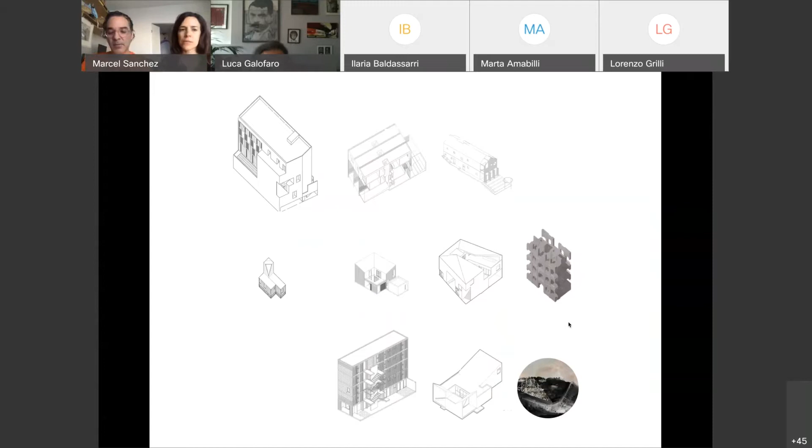And as well, we will present briefly our research in Rome and how Rome in Italy has been part of our influence in how to operate in this region. So the way has been a reference, a comparison - always a reference for us in operating in this border condition.

So we'll start with the first project, which is in El Florido, a mixed use at the outskirts of Tijuana. This is interesting - this project was interesting how it came to us. We did not look for it. This is a very common situation - we always look for the type of projects, not that the projects come to us. So it's strange for us, as we don't wait for the projects, we're usually formulating the projects, we're seeing how we can make it happen.

We're seeing how we can make it happen. So a woman walks into the architectural school that I was teaching in San Diego and asks for us to build this project in the periphery of Tijuana.

One of the first questions of these projects was how to approach and reconsider the corner strip. This was a little shopping mall at the corner in Tijuana, which is very common, where you leave it completely open for cars to park, and then the shops are stepped in the back. So it was important to define the corner with the wall, the boundary of the building, to re-articulate the street and construct the urban life.

But it was interesting also because at the end, this client comes and says, 'Oh yeah, you want to design this corner strip,' and usually right there, typically they are in the commercial area with the parking just in front. So we tried to kind of interlock it. But what became more interesting is saying, okay, the first level is commercial, the second level is a restaurant, and you have people with big bands and music - you imagine this Mexican population, right?

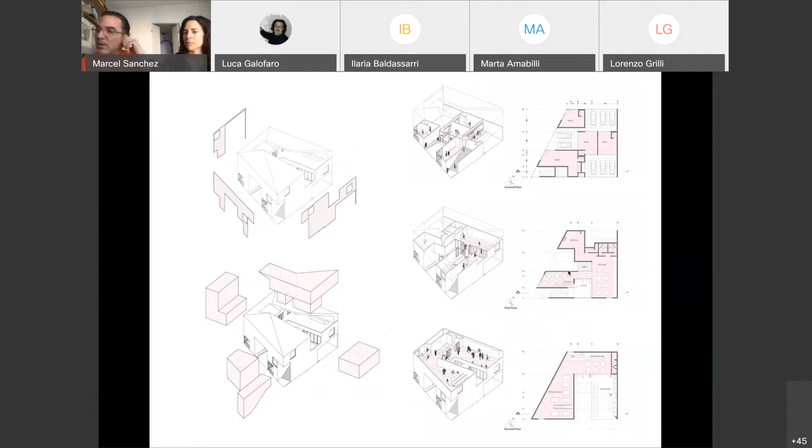But of course, at the moment when we're working with the client, suddenly it started to become rapidly about security, because the husband was in jail, he was a drug trafficker. And then suddenly we say, how do we work with this project? Suddenly the building needed to be protected, and we didn't want to work with her anymore. But at the end, we needed to finish it. So it becomes a very conflicting relationship of how to have this client.

So, anyways, in architectural terms, the skin of the wall is used as a medium to undertake this protection. We also had to consider that the buildings in the area have no maintenance. So the wall became this idea of drift, of dust becoming a second skin, a rain screen facade controlling climate, while taking advantage of time, using dust and its accumulation as a design opportunity, and the movement of the sun as a way to play with the effect of decay, how this dust gets celebrated as a registration of time.

So through the design, we designed this idea of 3 modules, concrete modules, that become this security blanket, also as a collection of dust, creating this effect across the whole facade.

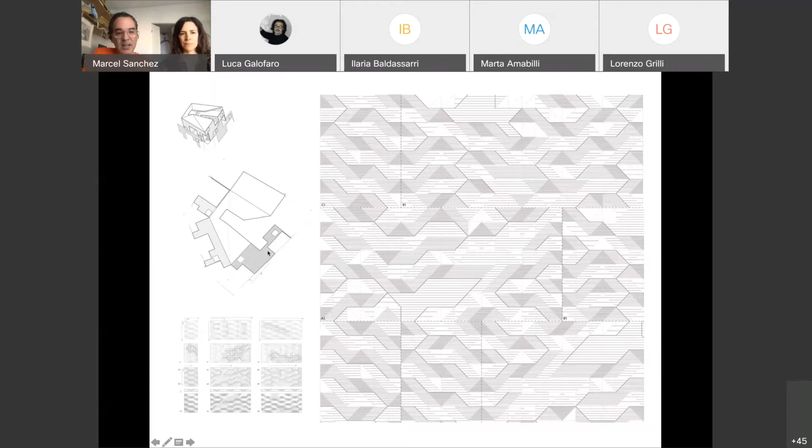So we started testing different materials — aluminum, concrete, and some wood elements. Concrete became the most practical to use. Of course we use technology and so on, but the technology is never the main driver of the project; we use it to understand the moment of construction, how to expedite things. So in this case we used concrete, and here you see the prototype.

Yeah, so here we have another prototype, a sample of the concrete. But we use concrete, right, to do that. Sorry, let me.

So as you saw, this is the effect of how the wall gets transformed and how dust gets accumulated. And here we see the idea of decay, how the registration of time becomes part of it. Of course, this is a project totally influenced by what we saw in Italy, how these walls that have a very luminous quality become part of the aesthetics of the building.

So now we're going to talk about the project that Luca was mentioning. This project is Casa de las Ideas.

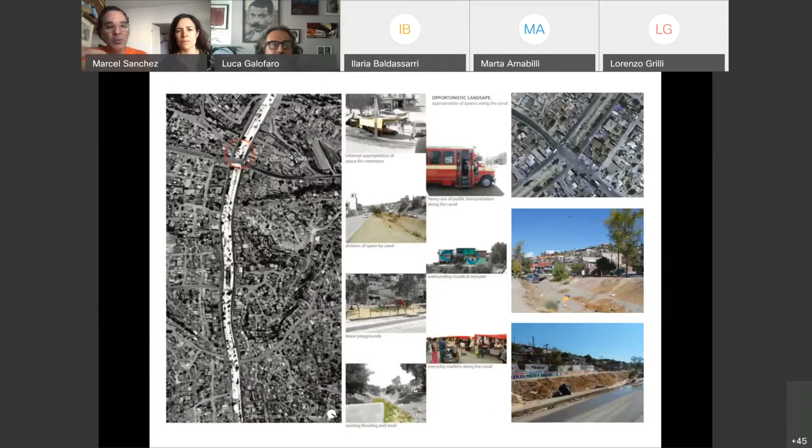So usually what happens is these are very topographical sites. Tijuana has a very strong topography, and usually the river or stream where water comes in becomes the only place people use as a movement corridor, and it becomes the depository of all junk and trash.

So it becomes a conflict because it's a point of infections and problems, but also the only way to access the city or get into these remote neighborhoods. One aspect our project tried to rethink is that we needed to do something about it. The concrete channel already floods whenever there's a problem, so we needed to find a way to stitch together the two sides of the river watershed.

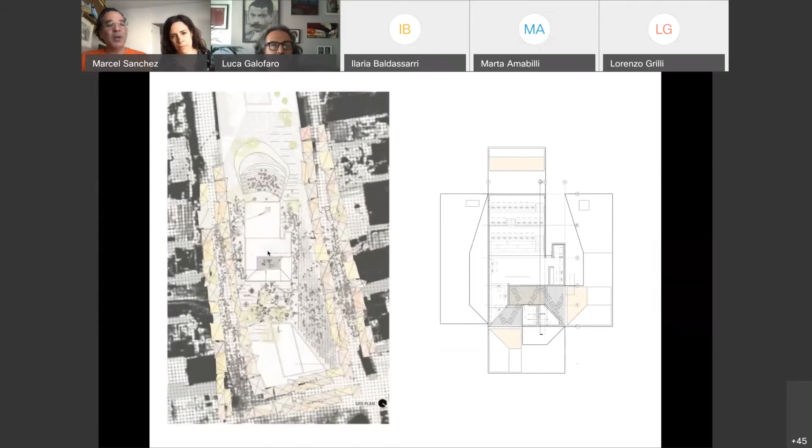So we needed to create a bridge, where the building also functions as a bridge. But initially, the idea wasn't a library in that sense - they wanted to make it a community center, and we said, let's change it more into a community library element that becomes access to information.

One of the most important things is how people get access to information, so we talked about this digital library - a space beyond information, sequencing interior and exterior stages. A few practical elements we needed to consider: we're going to have computers, and you're in a very high crime area, so we needed to protect, but at the same time connect.

Usually when people build in this context, they create a fence, and we didn't want to have that. So you can touch the building, approach it closely, but we needed to control access and create security for the building, while also allowing things to happen all around it.

There was an amphitheater proposed about 200-300 meters away, and we talked about how to fuse this amphitheater, tuck it into the building, and make it part of the project. The idea is about creating these entrances and stages - very controlled access, but at the same time figuring out how to open it up more.

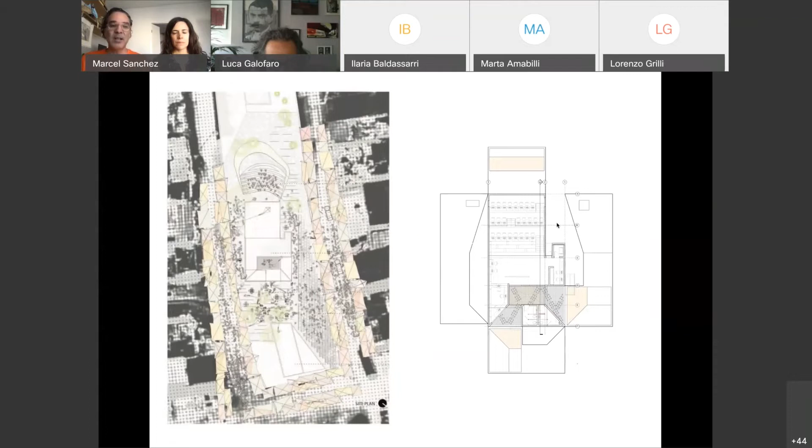So in this diagram, these entrances become stages, become platforms to talk - they become like microphones, if you can say that - stages where leaders can talk with the people, but also become seating places. They become elements where, of course, like a goal in soccer, it becomes the goalie area, or becomes a space for seating.

And then this idea of bringing the library, tucking it up, it becomes a series of stages, and then bringing in the other stage. So in the end, it's 100 to 200 square meters.

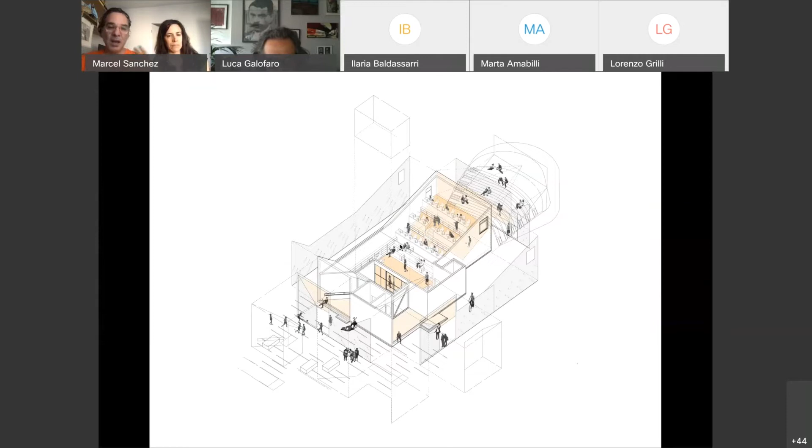It was $100,000 - almost like investing where, if you impact 10 people, that's $10,000 each. That's already a benefit if you see it in economic terms. So we had to build it for $100,000. We convinced them, saying yes, for sure we will impact 10 people and change 10 lives - that's already a plus, and for sure the impact went even further than that.

Some criticism at the beginning has been about how the building relates to its context - it's completely creating a difference. Indeed, the building is paradoxical. But what it creates, with its sharp edges contrasting with the informality, is something extremely formal - formal in the sense that it articulates space, it defines space. It has created a point of reference in the community, a piece of infrastructure that the community starts to identify with. So it's white.

But it was very important to understand that the white was not an enamorment of material.

We thought, since it's a space in a high crime situation, people would graffiti on it, do stuff to it. So the white becomes more like a canvas, a backdrop to informality, to things happening, and people would paint on it—so there's participation. How does the building participate with the community? I think that's the bigger question, as opposed to how it looks.

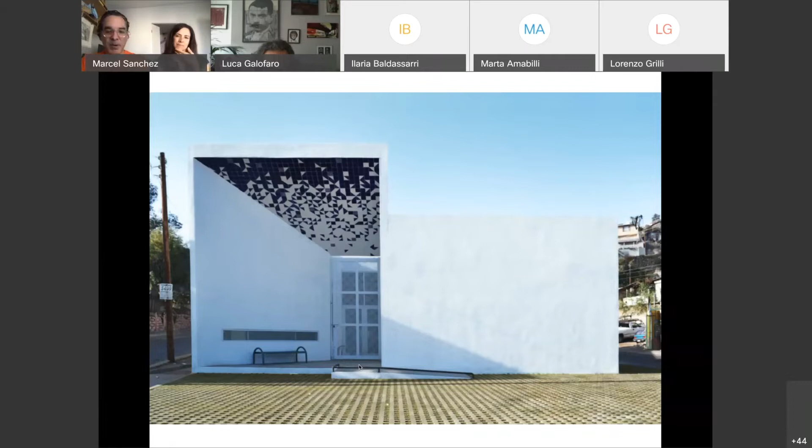We were wrong. We thought people were going to vandalize it with graffiti, murals, and stuff like that, but that hasn't happened. It's interesting that people are still preserving it.

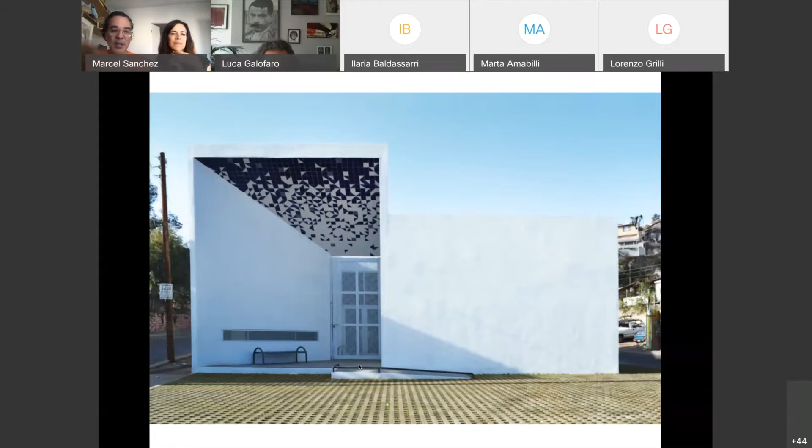So what happened? While we were almost finishing construction, the library gets hijacked—because there was a change in government, and the new government said it's not a library anymore, it's going to be a building for interacting with people, but really the headquarters of a political party of the community. So in the end, people reunited, and this is what happens.

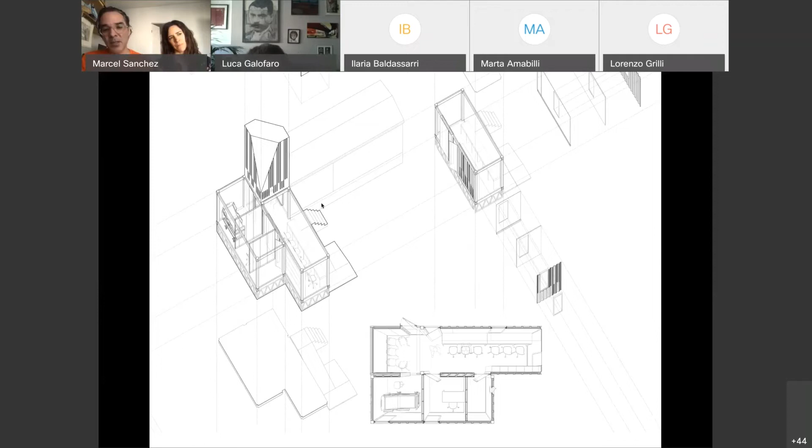And this is the module. It was built very quickly for $5,000, and the only real intervention we made was paint, giving it many characteristics. Sometimes what we're talking about is that the most essential things, like just paint, can create a change or an ambience, or even just the reconfiguration of a pre-existing element and rethinking it creates a kind of staging. So sometimes architecture is just about identifying these conditions.

So here you see, this is the module that was built outside of a hospital that right now is being used for COVID. You see how the paint breaks, creating a datum that breaks the scale. Even how the building can come close to a tree and create seating, it creates that space as outside. So there's a relationship to context, even though this is a generic prototype that can be applied anywhere, but it has the possibility of connecting to its surroundings.

So here's another one. These were deployed throughout Baja California, 32 of them, to the most remote areas where people don't have access. And a sad story is that when the government changed, they came and repainted them with the political party's colors.

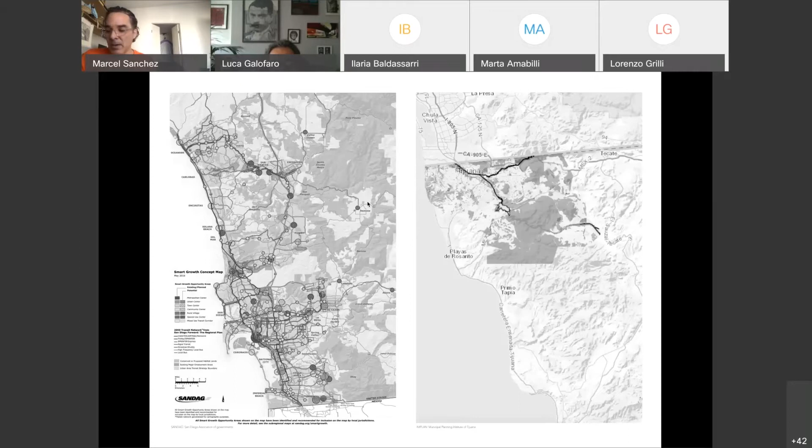So of course they go to Tijuana, because it's more affordable. You can rent a house for $300 and have your family there. The other way around also, people from the US, because of affordability, go to Tijuana for affordable housing. So they're being displaced, forced economically to live in Tijuana because that's more affordable.

So that has become a strain in Tijuana, it has become very difficult because income has been provided through the border market to an increasing group of families that see Tijuana as an opportunity, in a way creating an upscale to what they have in San Diego by filtering, but it's a filtering process from San Diego to Tijuana. But what happens to Tijuana residents is that when they cannot compete also with people who come and can pay $500, $600, there's a trickling down of socioeconomic things. So they cannot compete with the dollar, so the middle class goes down to the low, and the low then goes into inner slums and squatters. So there's a reversal of this impact in housing.

And of course, that has happened also, that the people who were building social housing in 2008, they go bankrupt. So there's a big void of housing.

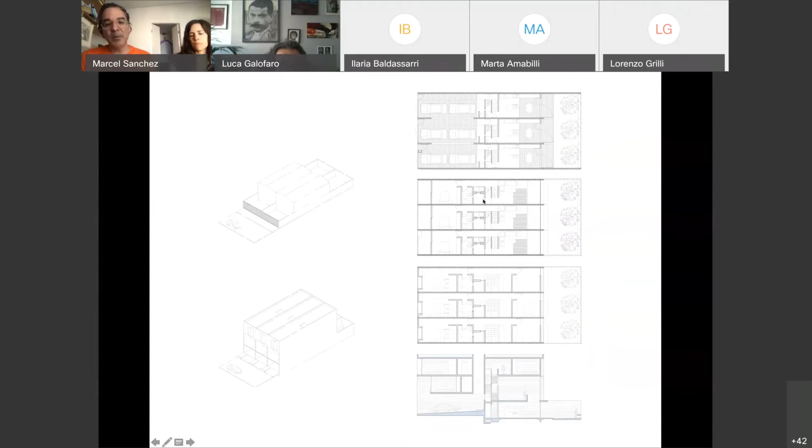So anyways, we tried to address a little bit how to not anymore create these vast projects of housing at the outskirts, but how to densify the typical lot of 2 houses, how to create a very slender project of 4 meters, and also create a very flexible way to mitigate this population. So you have, like I said, 4 meters wide, with a 1-bedroom and another 2 bedrooms. Here's a section, and this section becomes important because the idea was to create something flexible in many ways. Here, what you have could be a 3-bedroom house, or 2 bedrooms, 3 bedrooms, and then you have the living room and the kitchen.

But it can also be converted into a 1-bedroom house, an apartment, a studio, and another studio. This becomes important because many people then can find a way to sublet, to rent these things, because when families come, the children grow and they need to create another source of income. So we needed to find a way that the housing becomes another source of income.

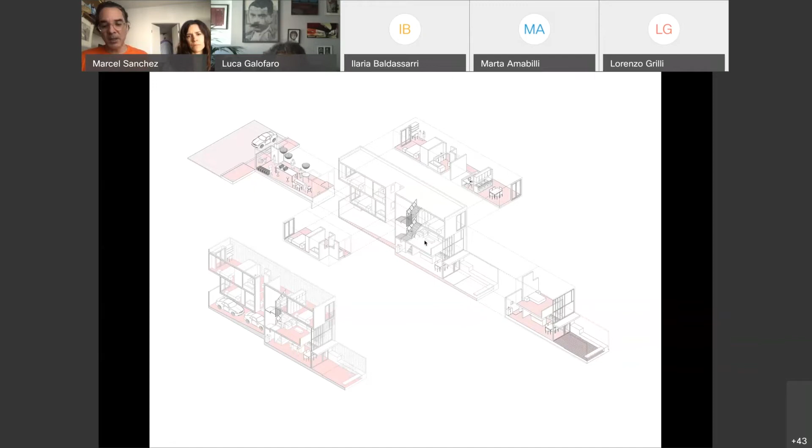So here you see, we needed to compete with what was built by Infonavit. It was $300 per square meter, the cost of construction, so very, very cheap. It had to be built simple. But from the other side, it opens up as much as possible to gain the idea of accessibility and connecting as much as we can to the backside.

So here, this is now how it's inhabited. And here's a very interesting scenario where you see she is a chef, a person who cooks in the United States and works in the United States, but lives with her parents. So this is the living room, and the kitchen is a common area, and the parents live on the 2nd floor, and she has her own apartment on the 3rd floor. So here it works in this scenario how to construct these layered densities, but work within the socioeconomic strata to have affordability for people in this realm.

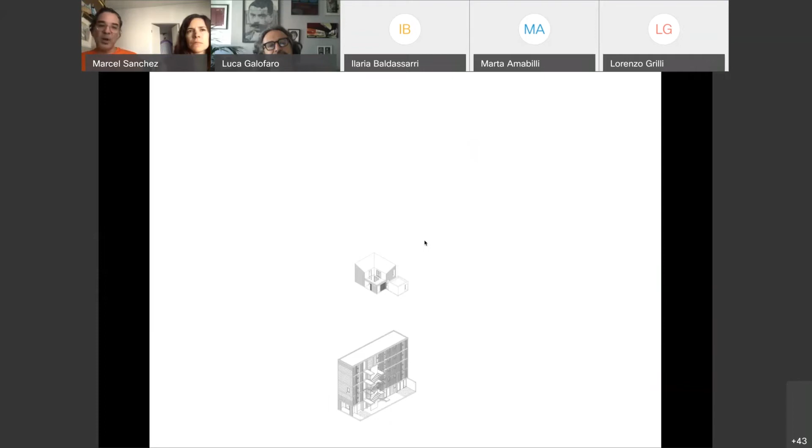So here's another project. Now the 2 projects we're talking about are even more about social housing, the part of the bottom of the economic strata. These are two projects that were created for Infonavit, which are the national funding for housing, social housing in Mexico.

In the 80s in Mexico, as was true in many other countries, developers were constructing what they called social housing, and they were putting it on stock, low income housing with no infrastructure at the outskirts and periphery of the city, pretty much destroying the urban fabric, not constructing a city at all. This lasted for about 20 years, and Tijuana was one of the major centers where these developments happened.

And so now they realize that was a big mistake, and they're trying to rethink. Now that these places have been abandoned, how can we rethink? So that was for the vertical project, and we'll talk about that in a second. And then the small one was for the rural areas, where we have in a way kind of forgotten about the rural spaces and how to provide services there, while respecting the environment and the landscape.

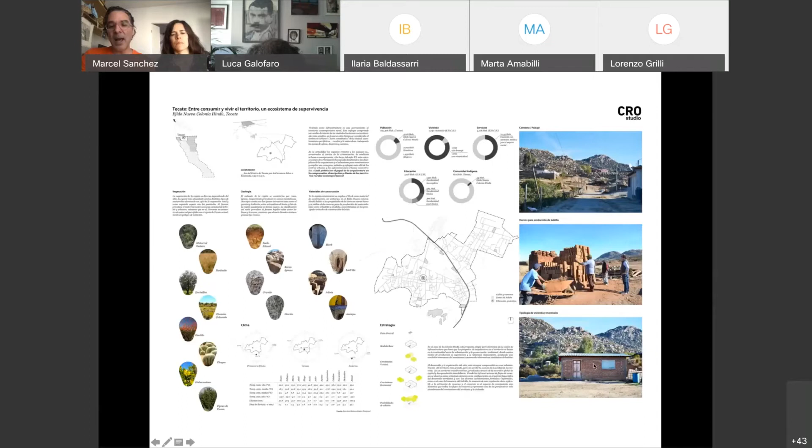So the community in question has 4,000 inhabitants located at the outskirts of Tecate, and it's mostly engaged in the production of this pottery and brick. It's a marginalized community that's more or less 20 years old, and usually the house that they build is this type of house.

So anyways, the use of the brick becomes the basis of the project. We thought of developing the construction with the same material, but trying to introduce more environmentally friendly production.

The little unit is only a 46 square meter unit that has an entrance into a little patio where they can clean themselves or use it for the exhaust of the bricks they're producing nearby. Then there's a series of modules of openings, either as windows or doors, that can be interchangeable for future growth of the family.

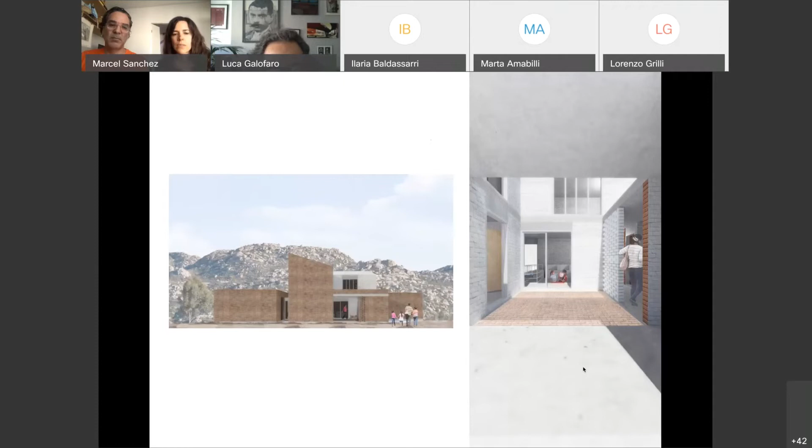So yes, this is an example of the patio and how the building could grow horizontally and sometimes vertically.

With a very strict budget of $11,000 to build this first module, the first stage, one of the challenges was to maximize the use of the brick for thermal comfort, because it's in a very extreme climate. Being that it was produced on site, there was an opportunity to create a double layer perimeter that brackets the space.

The proposal looks for growth as a generator and as a possible urban fabric. So the idea of this module, the space of the center becomes important, because people produce brick, and it's a very dirty kind of thing. So the entrance, the transitional space, the idea of the patio becomes very important as a cleansing approach, and also as a way to unite and connect the units themselves.

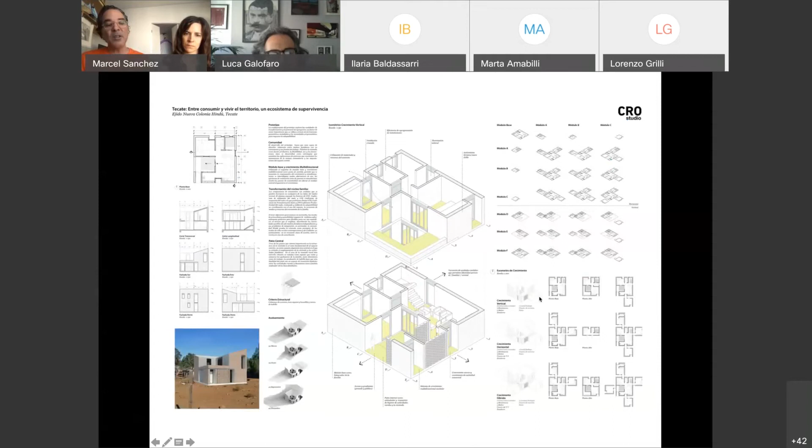By standardizing these doors, the windows, and everything, we considered how the growth of this unit can go horizontally, but also vertically, like we were seeing in the image. This unit is very flexible for these communities, where people work this area as companies, and as soon as they need more people, family members come from Oaxaca and Chiapas, and they needed also to grow and create this kind of expansion.

So anyways, this project, not knowing at the end, was part of a competition with 150 plus proposals for the Research Experiential Laboratory Infonavit, which is this kind of laboratory at the outskirts of Mexico City, where they selected most architects, and Michael Meredith and Hilary Sample were invited to design the master plan.

And then the proposal, from these two projects, they were built in Apan, Mexico. This becomes a laboratory that will be used as a meeting point for reflection and improvement of housing financed by Infonavit, the financing institute.

Although it's great that Infonavit is aggressively investing and involved in generating alternative conditions that invite architects to produce architecture, I think it would have been nice that all these modules were built where they were designed for. Suddenly it becomes a little bit like a showcase, a showroom of these kind of architects, and once again there's this notion that architects always have the solution, and then suddenly they get detached.

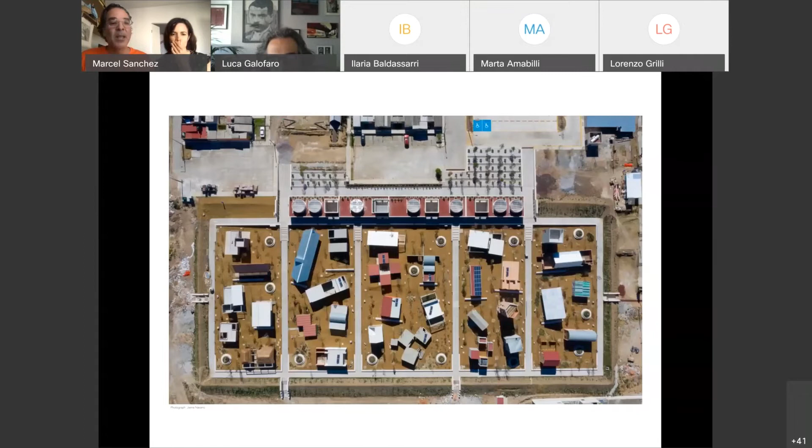So anyways, the essence is that we proved — I think for us it was interesting that we proved we were able to build it at the budget. At the budget, but not even under budget — actually under budget, so it was under what they had stipulated.

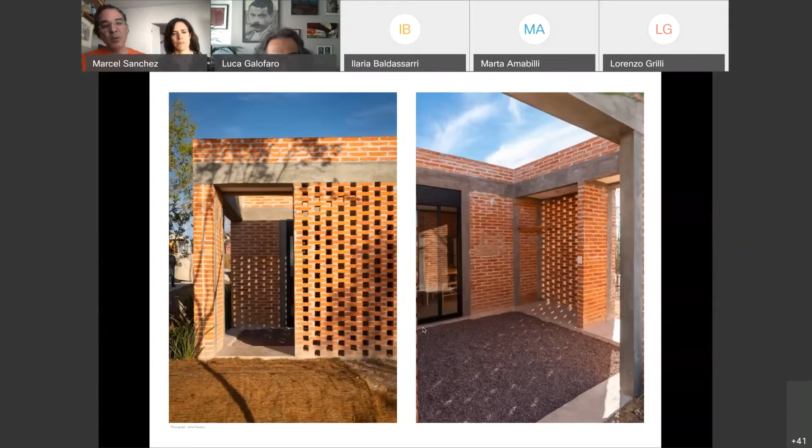So here the idea is this very simple condition of the patio, but trying to work as efficiently as we can with the materials, constructing these elements efficiently, standardizing the openings, and then trying to dignify as much as we can the interior space.

It's really interesting because it was published in this magazine, and you can see, for instance, our budget was $11,000, while there were projects building at $13,000, and even some at $16,000 that you can see here. So suddenly it's way out of budget.

So it becomes this kind of simulation, architects simulating the idea of consciousness with respect to what we're building. But in reality, there were architects just building a kind of semi-idea of social interaction and social responsibility, while being way out of budget.

We built it in $8,000, so we had $3,000 extra. I think that $3,000 extra is very interesting because it can be used to grow the unit as you want, or become an investment for commercial or other activities. Sometimes it's not the architecture itself, but other incentives that need to collaborate with architecture.

The landscape, yeah. So I think that $3,000 is something we call almost like micro grants. Anyways, this is a moment to understand when architects need to know when to stop — there's no more that architects can do, and they need to know it's not a solution anymore.

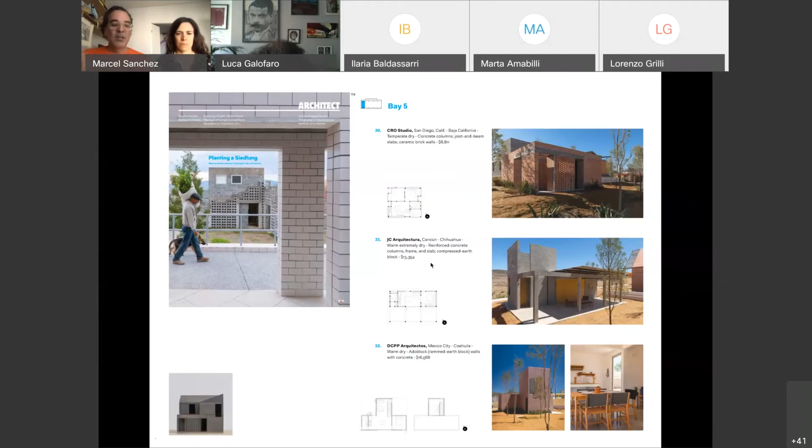So at the end, this is another social housing project. This is the one we were mentioning before, the periphery construction of single family dwellings for low income, that completely crashed. A lot of these neighborhoods became abandoned or crime areas. I think Luca came to visit one of those very depressing areas in Tijuana once, I remember.

So right now what's happening is Infonavit has constructed this document and a reflection on it — how can we recycle these spaces? They're already built, and there's some infrastructure, not a lot.

What this project basically looks at is the existing single-family lot, which was 5 meters by 25 meters, 20 meters, and how can we densify it. So this is a prototype thinking about the redensification of this particular lot proportion, which could be deployed in constructing a city. We looked at how to minimize the width of the tower, and we also proposed 4 units — there was an economic model.

It had to be feasible, and how to provide funding, and how families could pay the mortgage sustainably, an economic model. And from that we departed, in terms of the architecture. That's something that was really important in this project.

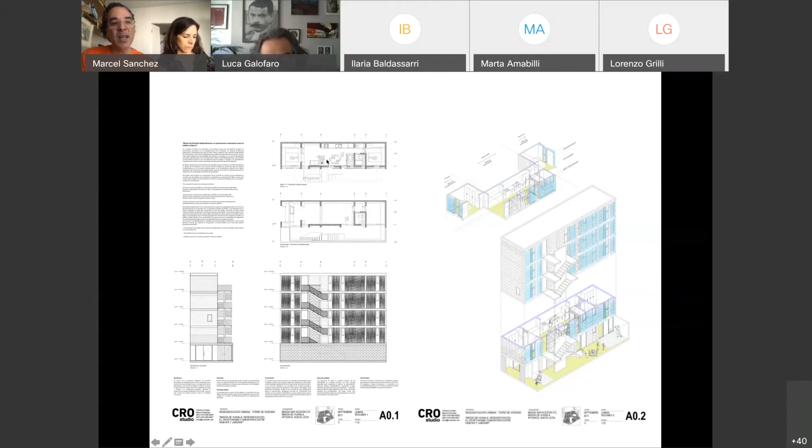So in this case, the stair becomes strategically positioned so that this space and the unit can be transformed, because usually 50 or 60% of the people need to create another source of income because they work somewhere but need another way to create income. So usually that gets transformed on the bottom.

We created these aspects of how the stair works across many levels. For instance, on the 2nd level, there could be a little tailor shop, or a little fondita or restaurant, or another production element, depending on the necessity that suddenly they need to create. Housing is not anymore just a place for the family to stay sedentary, but it needs to become something economically feasible, something of production of economy. So the bottom also can be transformed.

So this way we position the stair to become that. And then suddenly, to create this kind of like the Acapulco chair plastic, that creates a second skin, almost like a screen, to alleviate a bit of the thermal condition, but also becomes a reference saying I live in the pink one, the one with the yellow. These elements that pop out in the landscape of these more densified units become also a reference by the condition of color. So anyway, this is the idea of how the unit gets transformed, becomes more integrated to the economic factors we're talking about.

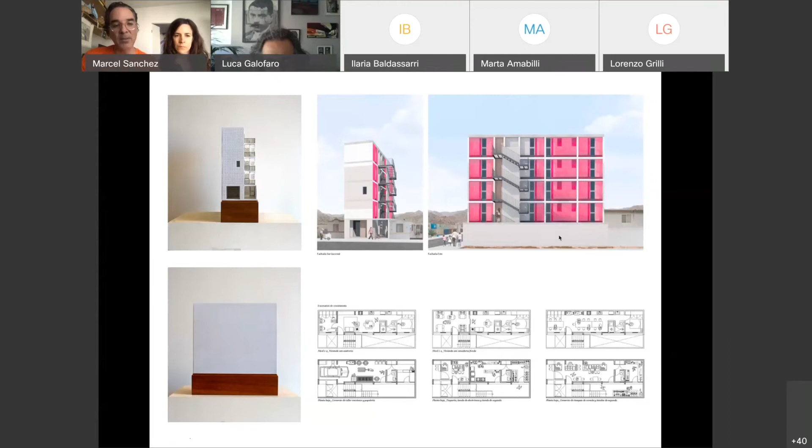So now we're going to jump into scale, and this is a project that was also of a lot of interest. It's a cancer treatment center, a hospital in Tijuana. I'm going to try to explain a little bit the relevance of this hospital.

Interesting enough, in Tijuana, many people from the United States come to buy medication, drugs, and everything, because it's almost a fraction of 4 or 5 times less than what it costs in the US. In the last 8 years that's become important, because now many people who don't have access to healthcare come and get healthcare in Mexico. So now it's once again the other way around, people being displaced because of lack of accessibility from the United States. This is a diaspora, a cultural diaspora, an exodus of population from the United States to Mexico.

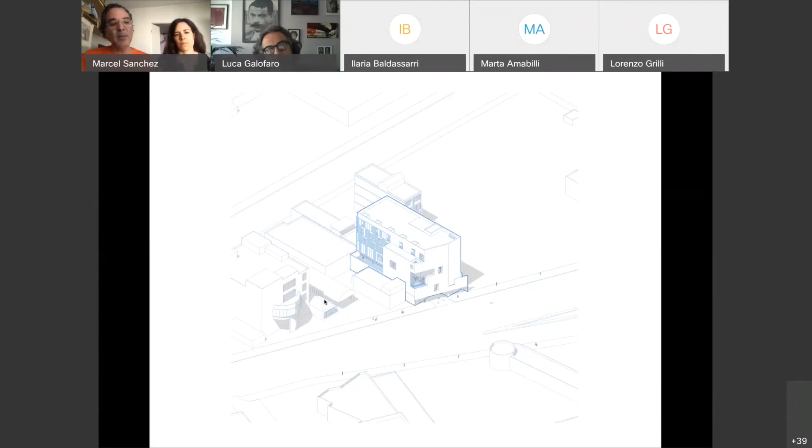The building we try to design is a new density, a new building that is consuming more as more people are coming to Tijuana to get treatments. So it becomes a transformation of these buildings as we saw in the back, right? So these buildings become denser and more specialized.

In here, where you see these towers, these are housing, but there are other towers currently being finished right here that already incorporate rooms to rent where you can go and stay for periods of your treatment. So it incorporates housing.

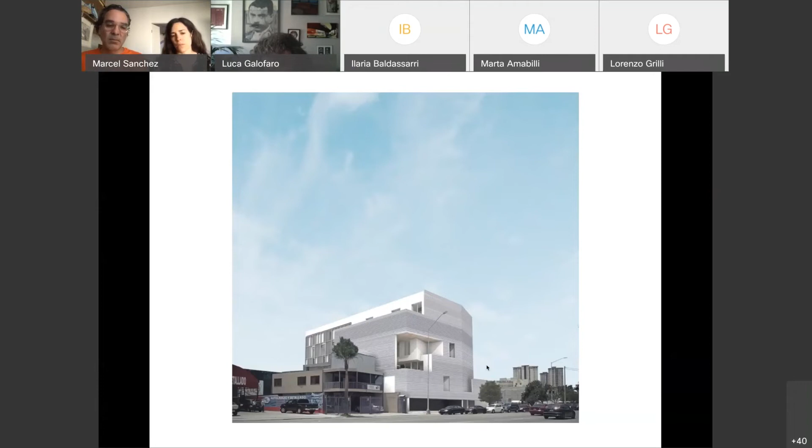Increasing distance for reducing medical errors was a big factor. Also, how the layout of the rooms could help in safer practice for medical staff, and which elements we can introduce to improve social life, so distance and orientation.

So here are key factors we were thinking about, like this unit of the room. In the corridor, we created this little niche, so people can sit while they're walking around and recuperating, creating kind of a street-like interaction, so as not to dehumanize this aspect.

The other aspect is that we concentrated a locker where all the medication can be distributed in the rooms, to reduce the problem of medications being centralized in the nursing station. The other factor is that all the rooms are oriented in the same direction.

So when nurses and doctors come in, the flipping or mirroring of the units doesn't produce an error connecting to the equipment. Another factor we created in the unit is that we incorporated apartments.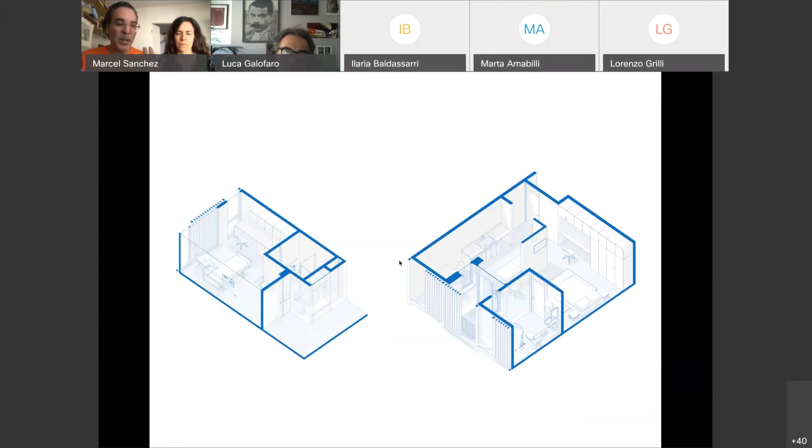The building is under construction right now. I don't know, with the current conditions of the coronavirus, I think it's going to be hard to see how far it continues. Hopefully it gets finished, but it has been a big problem. Anyway, this is an emergent typology that is working right now.

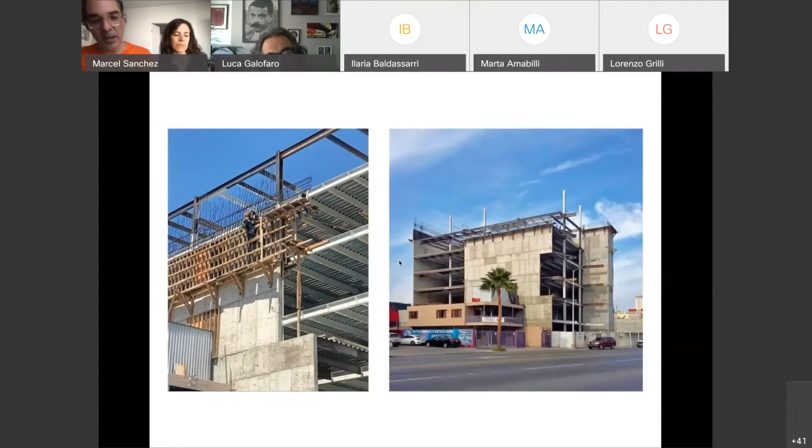I think this is our last architectural project that we're presenting. This is a housing project we're developing on the other side of the border in San Diego, with some friends. What's interesting is that, as you know, in Southern California particularly, you have the big lot and the single family house, and then a huge housing crisis right now.

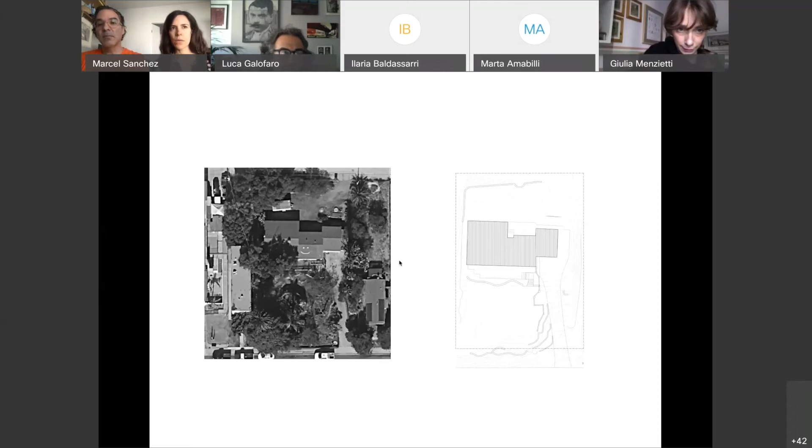There's really a lack of housing. Cost of living is becoming one of the most expensive, not only in California but in the world, in terms of square meters and price per square meter. So what we're looking at is the division of the lot.

Our friend Tyler Hansen purchased this land and invited three architects to each start the development.

This is becoming an interesting project because, with the conditions we're currently in, it's making us question the future of this development, with all the freezing of money and funding. How can this be possible in intensifying this place?

So anyway, this project, like I said, Tyler, a friend from MRED who teaches at the Master of Real Estate Development in Architecture at the school where we were teaching, found these things. He found a loophole in the code and a loophole on this property, because usually this property, like we were saying before, is one house. So we were able to divide this house.

This idea of single family residence zoning has been a big problem in the United States. That's one of the main reasons prices have skyrocketed. So we were able to find this lot and subdivide it, creating a subdivision of the lot that was one single family.

The idea of this division, this idea of incorporating division, suddenly resonates with the conditions of borders, conditions of segregation, and doing these things. So as we divided this element, of course more divisions started to happen there.

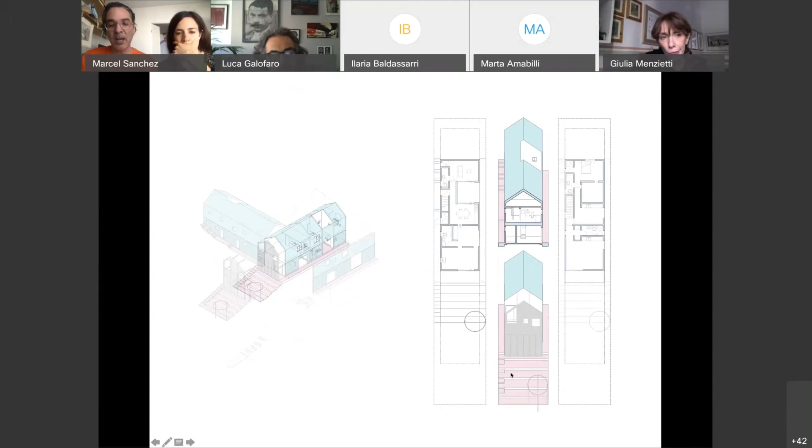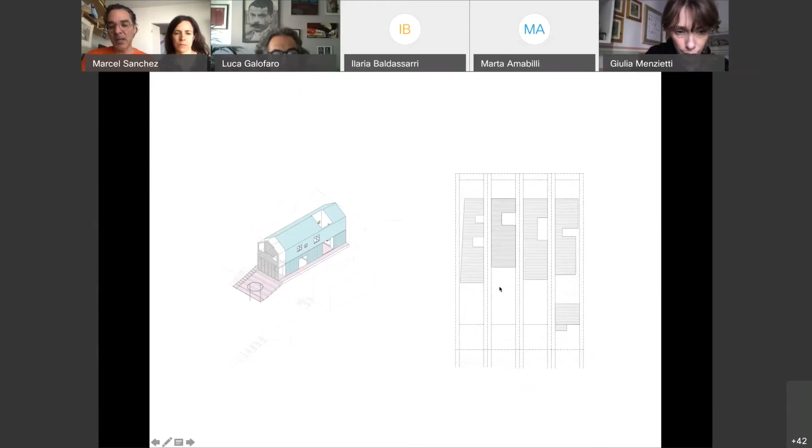So here's what we started to think about — that the unit itself, the facade, the detachment of that screen, becomes an element as a backdrop to the whole houses. We were thinking that at the end it becomes a backdrop to create a collective idea of this space in front, becoming a staging element, and then of course a gathering space of sorts.

So once again, the edges are the opportunities for that civic negotiating, interaction, for constructing community, right? As opposed to separating yourself and not being in it.

And this is foreign, of course, to the US, right? Because they were introverted, it might not happen. But we said, hey, let's position it this way — and even our American friends were a little like, no, we have to be introverted. We didn't say this so much to them, and they were like, why are you doing this? No, it's supposed to be this way. But we said, here it is, let's try it out. Let's see how that works.

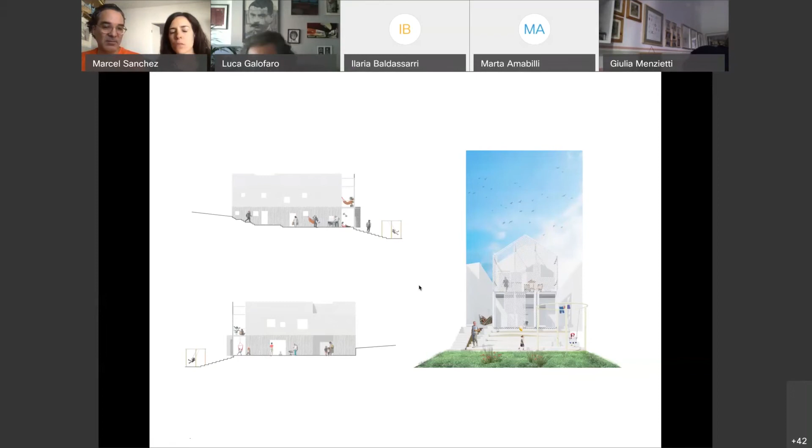And even now, I think with the COVID situation, there's that need for community, regardless of whether we can be together or not. So I think it becomes even more important and interesting — how these living spaces relate to each other, even if you're not physically together, but how do you really construct that sense of community.

Anyway, right now with the situation, we were planning to start construction this month, but with everything going on we haven't started. We're waiting a little bit — we're in the process, and hopefully we can start construction in two or three months.

We have building permits, so we are ready — the obstacles of the code and everything are done, we have the building permits. I think at least one of our friends is going to start construction soon; he's in the process of setting it up. So hopefully we can start construction soon on this project.

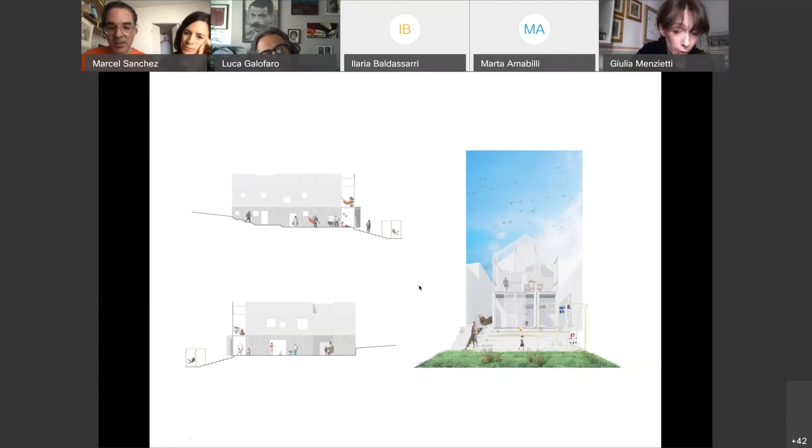So while we're making projects, what is it about the border that we think is unique? You have cities that relate to monuments, or the way the border has become a physical monument or element in the city. Instead of just looking at it as something harsh and complicated and difficult, how can we take advantage of it? The border can be seen as an infrastructure, but also, architecturally, as a monument.

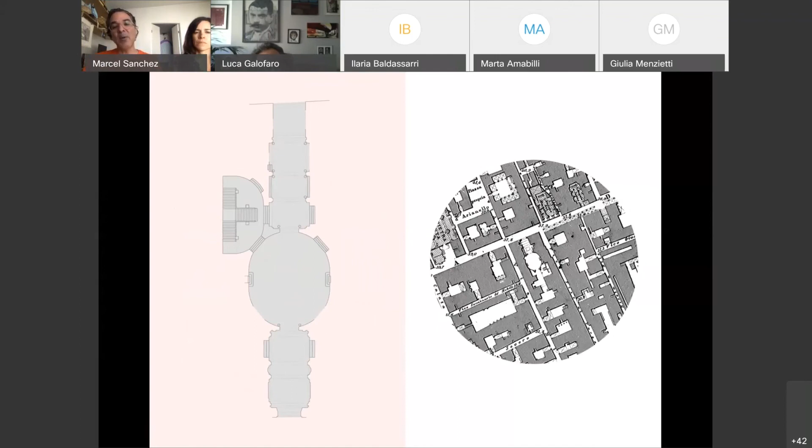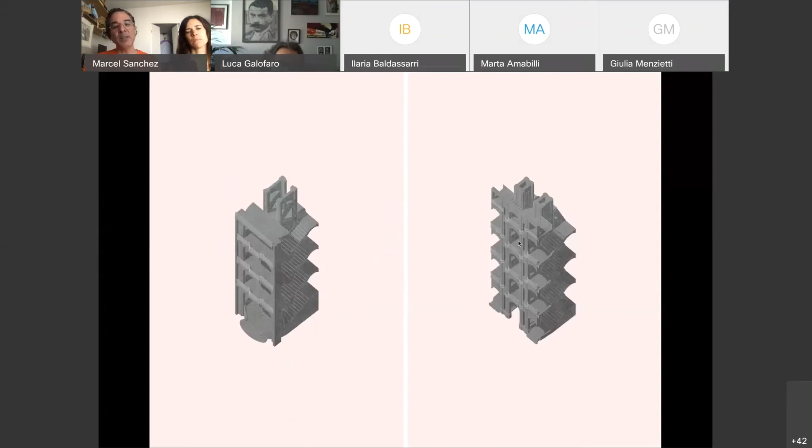Here you will see the transformation of these palazzos and how the stairs become part of it. For instance, here, another one, where two palazzos were fused in the connection. And here, once again, the Palazzo of Ferdinando Sanfelice, and how these stairs are being transformed. So you have the two stairs, the Ali di Falco and the Scroll Stair, and these two elements became the ingredients or prototypes that were transformed later on.

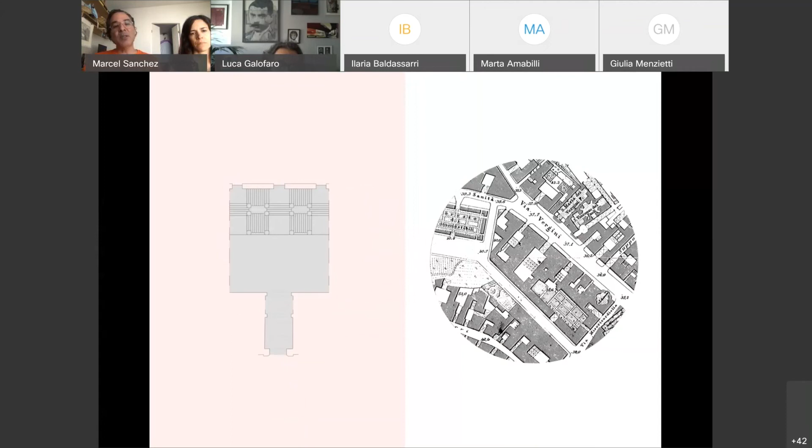Like these ones in the main street of Toledo, which transformed the whole city. So at the end, all these palazzos became an interesting point of how they're dealing with architecture, but also how a stair has an impact at the society level, its contribution to civic condition, how a stair as an architectural element has a transformation at the urban scale. Two quotes synthesize this idea, in my view: Cesare de Seta's idea of the thinning or thickening of buildings constructing these negotiating elements, and Anthony Blunt, one of the first to register and study stairs, who talks about the complexities and dexterity the stair needs to accomplish these things. These are ideas between architecture and the relationship of the city.

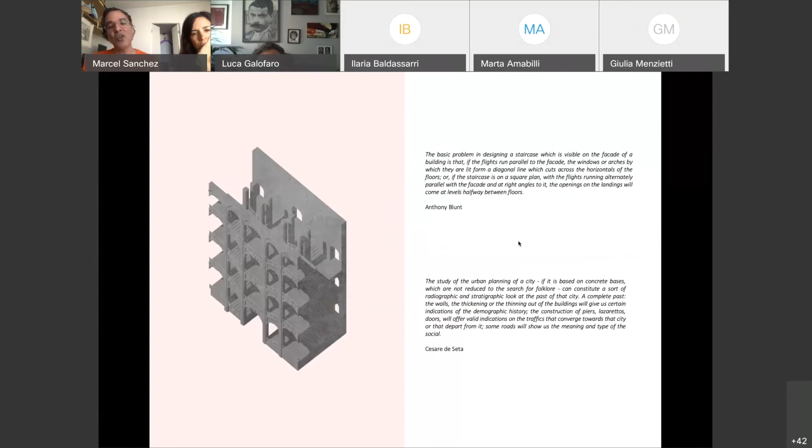So at the end, we tried to capture all these things. We created a catalog, and hopefully this catalog has an impact on understanding how we see the cells of society, how we see that architecture has an impact in society.